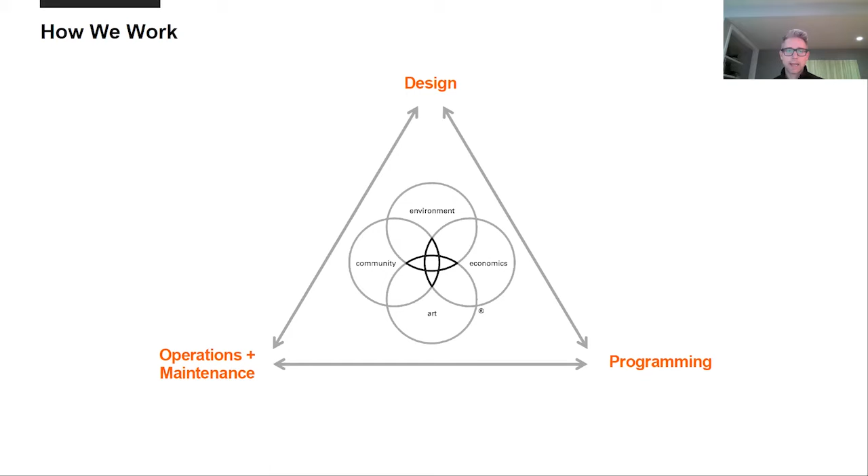We are a planning and urban design and landscape architecture firm consisting of roughly 150 super intelligent individuals who care dearly about the public realm and changing the world for the better. The firm has been around for nearly 50 years and has grown to 8 studios across the country, allowing us to work on a very broad range of projects, both domestically and internationally. Our process involves approaching each project from a comprehensive perspective that involves more than just design, including the activation and programming and the operations and maintenance of the spaces that we get to work on.

Today, I'm going to talk about 2 projects where we've reprioritized mobility and accessibility to allow for placemaking to occur. I'll be discussing our work at the Utah State University and in South Lake Tahoe. So first, let's talk a little bit about what it means to be in Logan, Utah at Utah State. We were asked to come to Logan, for me the first time arriving there, pretty special place set in the foothills there, to see what we could do to help restitch the Utah State campus back together again.

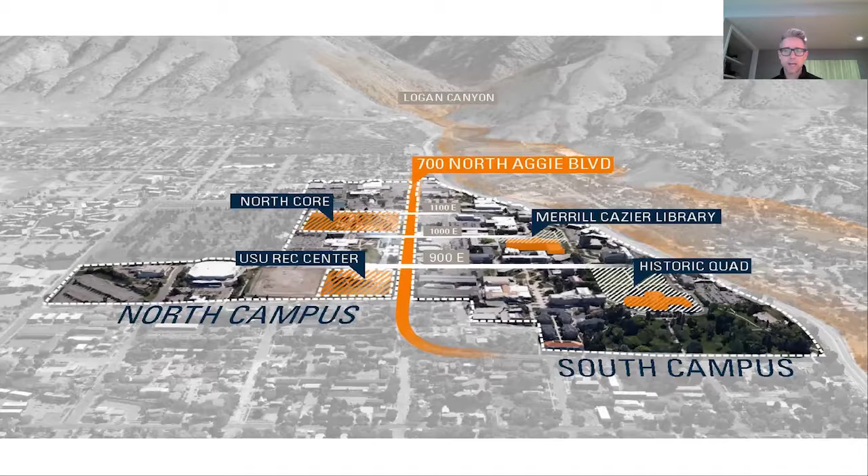What we found is a campus divided by a road designed to provide convenience for drivers at the expense of the true sense of campus and gathering. And this is very similar to what we've seen throughout the Midwest and on many college campuses. We learned that the original master plan from 1912 established 2 key axes that link the key open spaces together on campus. But as, again, many campuses have evolved, that key spatial order dissolved with the post-war growth and emphasis on the automobile. So our intention and our goal was to refocus on a barrier-free campus core and repair the damage that was done.

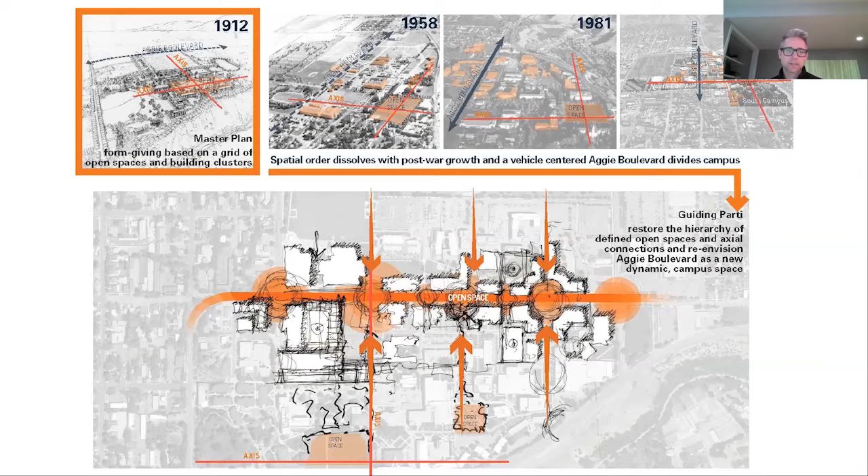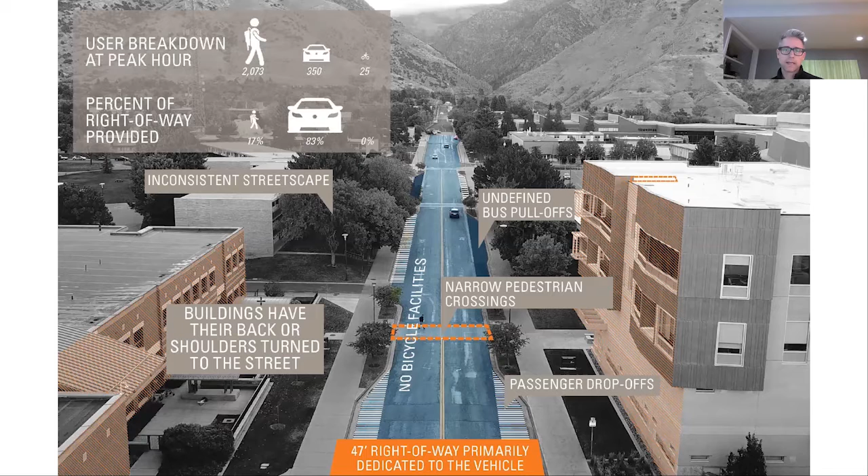What we found is very similar to many university campuses throughout the country, a massive barrier to mobility, accessibility, and unity within the campus in the name of convenience and ease of service access. These numbers showed, as suspected, a congested corridor that was prioritized for automobiles and their convenience, not pedestrians, and the safety and the movement of people.

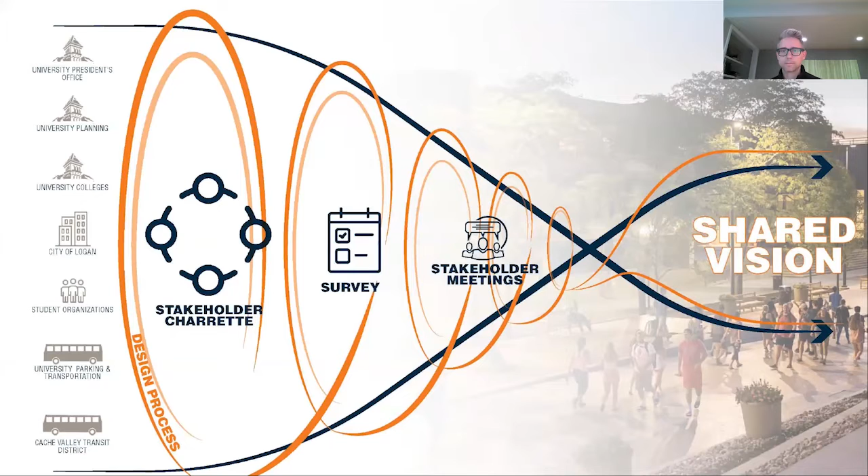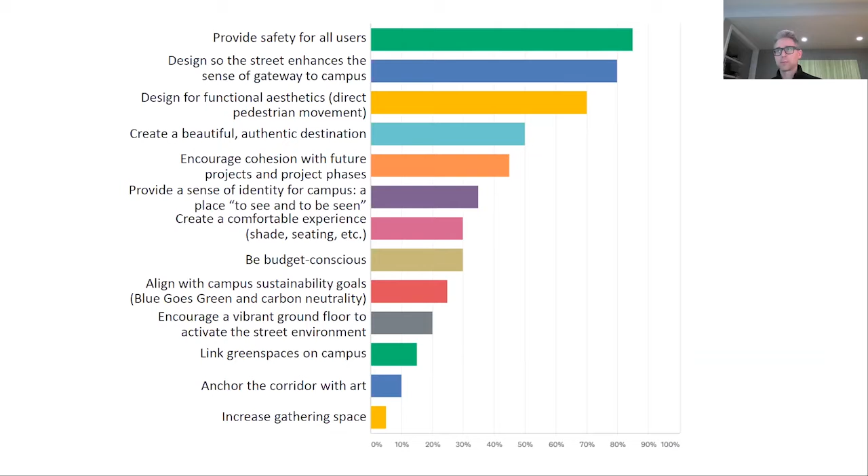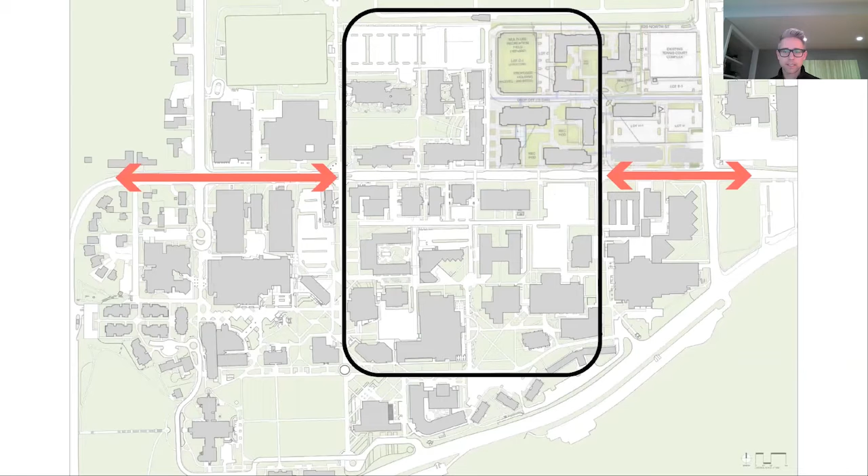As you can imagine, working on a university campus involves many stakeholders, from university leaders to public works departments, transit organizations, and so on and so forth. So many stakeholders, most times with competing priorities. Sorry, not advancing. But they were all aligned around this common goal of providing safety for all users, which was the key thing that we kept bringing people back to. Our goal was to go all in on the idea of completely removing automobiles from the center of campus, providing barrier-free mobility and returning to the original intent of the 1912 campus plan.

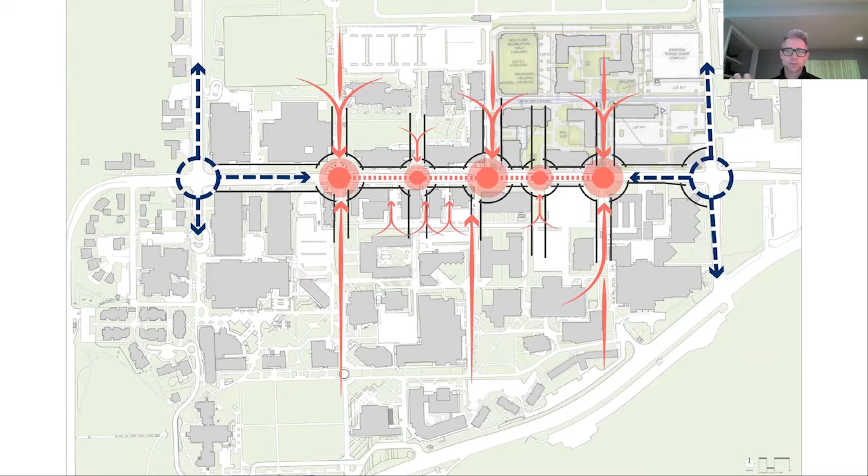This would allow a refocus of energy around nodes and points of crossing to provide safe access from North Campus to South Campus. To be clear, we were not recommending the removal of the campus transit circulator. That was one component that had to exist to provide sort of safe mobility to all parts of campus. We just wanted to remove the personal automobiles.

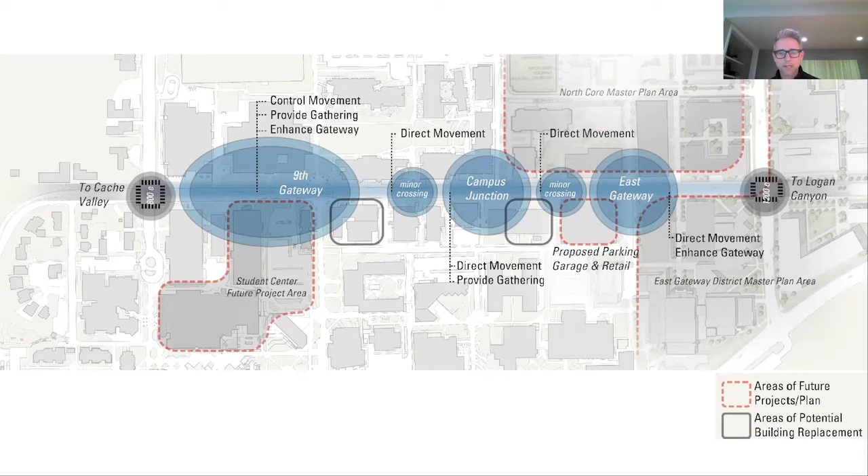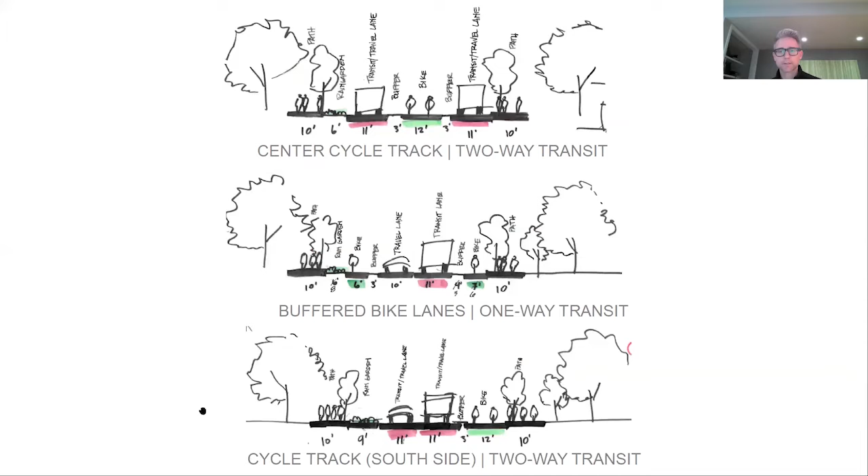So we still needed to address things like access control, large and small crossings, and the potential of reimagining this corridor for festivals and student gatherings. So we quickly studied a number of alternative sections that involved four main components: pedestrian movement, bicycle circulation, transit circulation, and green stormwater infrastructure. The vision we were selling was this access-controlled center of campus that accommodated all beneficial modes of campus mobility, phased in over a period of time, as most campuses do, to retrain people into no longer viewing this as a barrier, but rather a place for people.

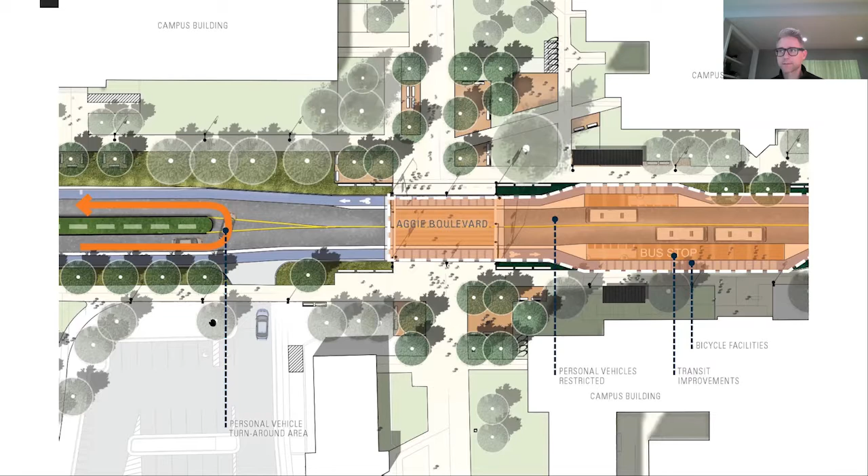As we look into the detail, a lot of what we were trying to do was to provide these safe nodes along Aggie Boulevard. We also incorporated inline bus stops and other mobility features, but this was really the point at which we were trying to stop the personal vehicles. And here's a crazy idea that you can actually train college students. What we discovered here was that by installing pedestrian controls, we could also reduce the number of pedestrian and transit conflicts. And you'd never believe that you could actually have a bunch of 20-somethings complying with those pedestrian controls.

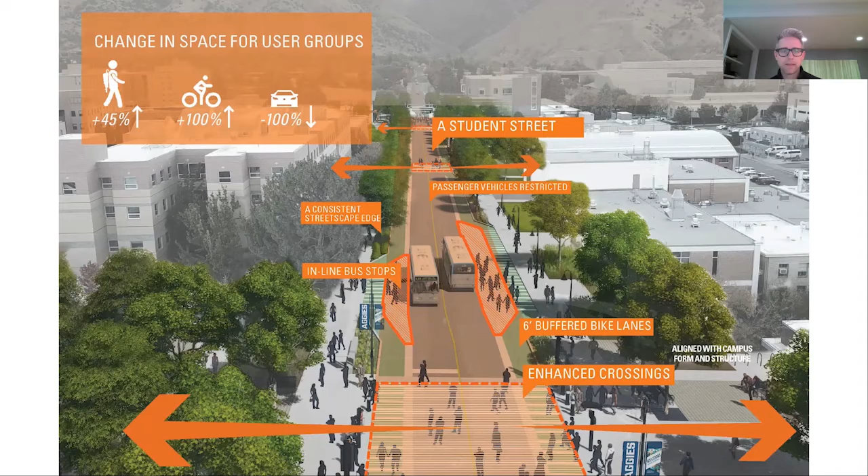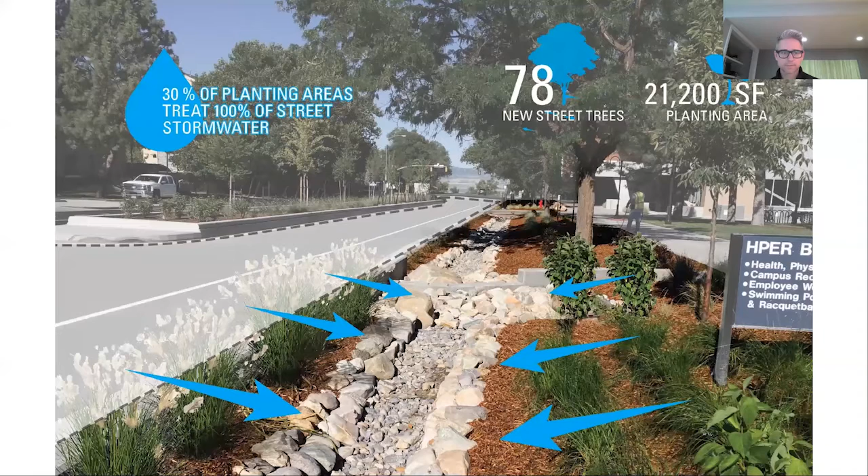As you can see here, in the end, there were many compromises that had to be made on all sides of the tables. We didn't get everything. We would have loved to completely shut this portion of the campus down. But we do believe we've moved the needle closer to a unified campus that is safer than it is today. And now in this section of campus, we additionally are able to treat 100% of the stormwater that falls on the street. So thinking about streets as complete streets that serve more functions than just moving automobiles. And this is the vision that we're trying to create here.

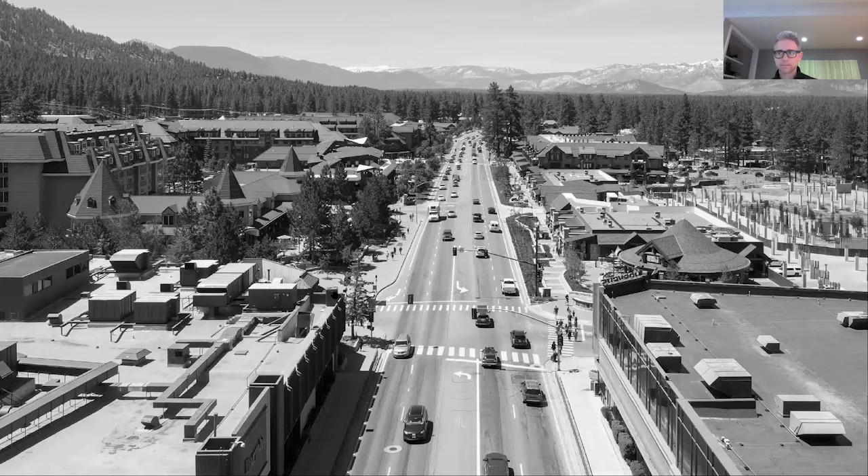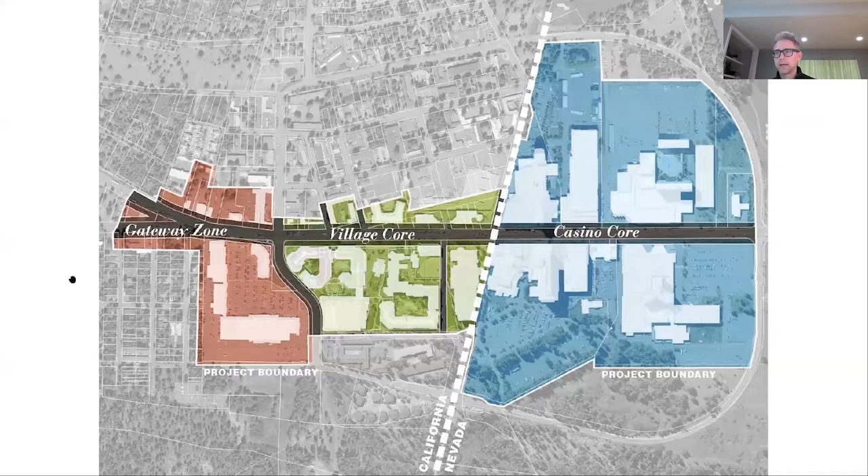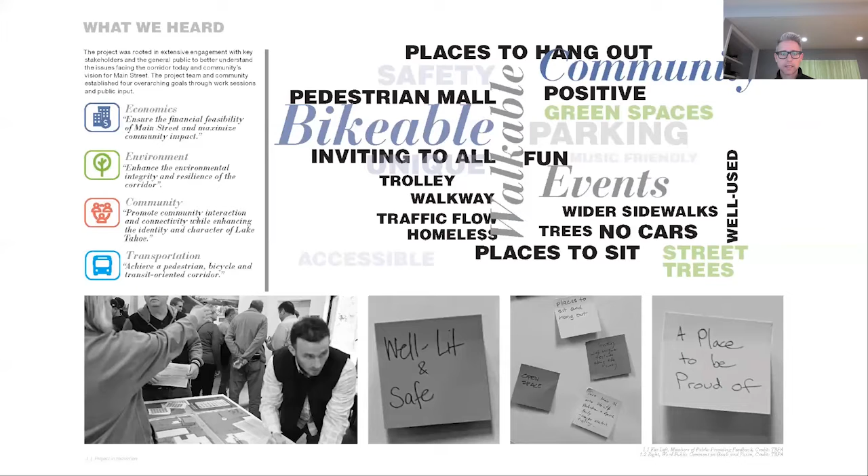So our task is trying to align all of these groups around a central idea and a Main Street concept. So we began by listening to the community, to a large stakeholder group, and started to prioritize and establish measurable goals along the way. Again, everyone was aligned around this idea of creating a much stronger pedestrian environment, one where it could provide a new identity for South Lake Tahoe. This all resulted in 5 main priorities, mainly focused around providing places for people and increasing accessibility and mobility.

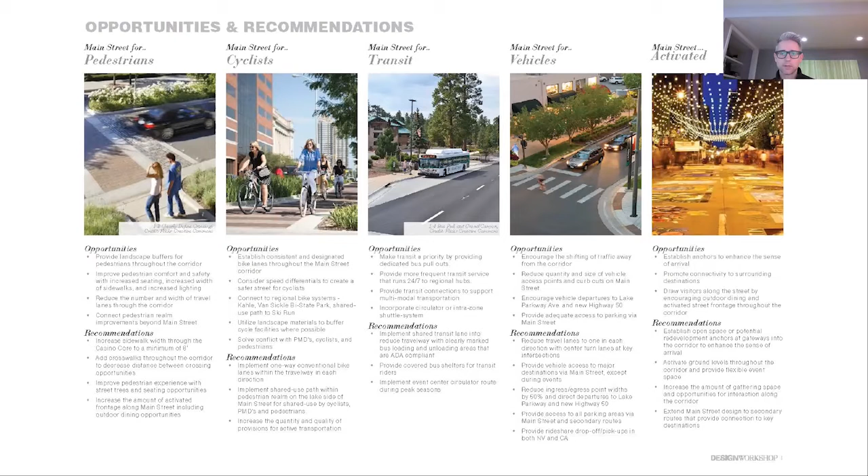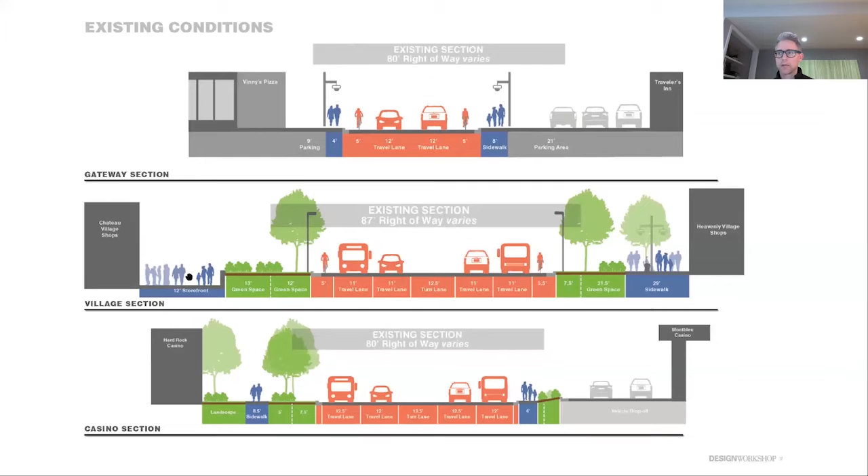As we all know, working on projects like this, rarely is the street cross-section the same. This is a mile-long corridor, and we had 3 very distinctive existing conditions to deal with. And so that was one of our main focuses, trying to figure out how to create continuity through this entire mile-long corridor. We tested a lot of the ideas.

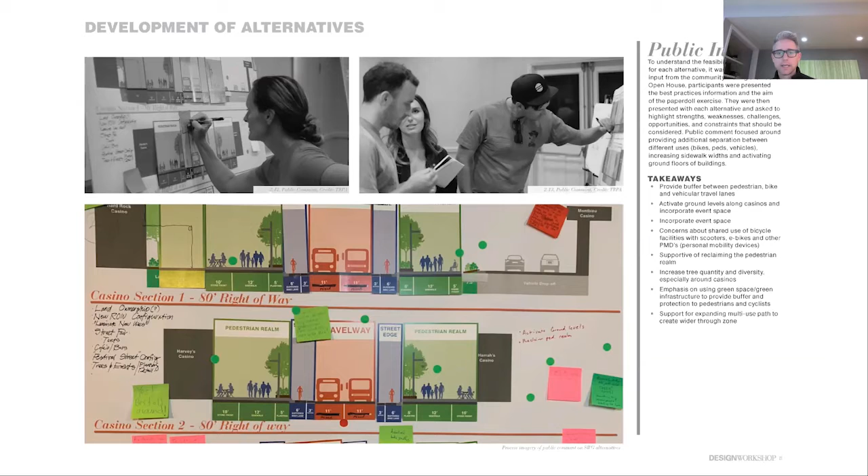We turned to the community to test these concepts and get some new perspectives. Specifically, we learned, shockingly enough to me, that on-street parking did not actually score very high in the list of priorities for the community. They wanted this significant road diet and more space for bike and micromobility and pedestrians.

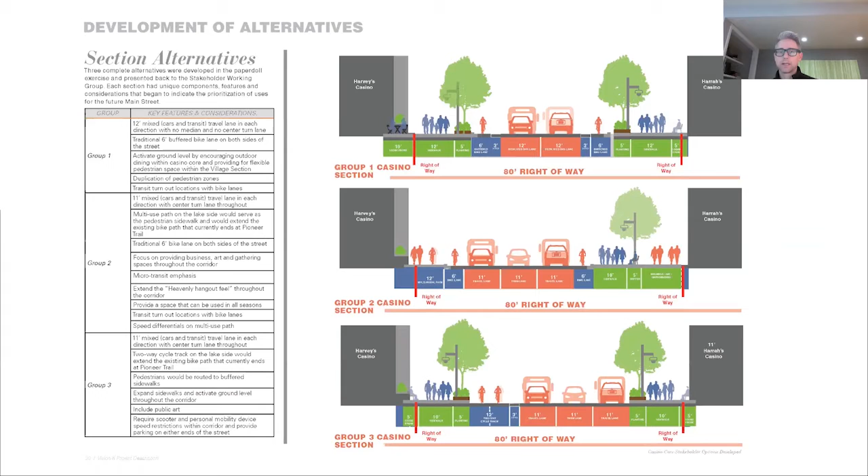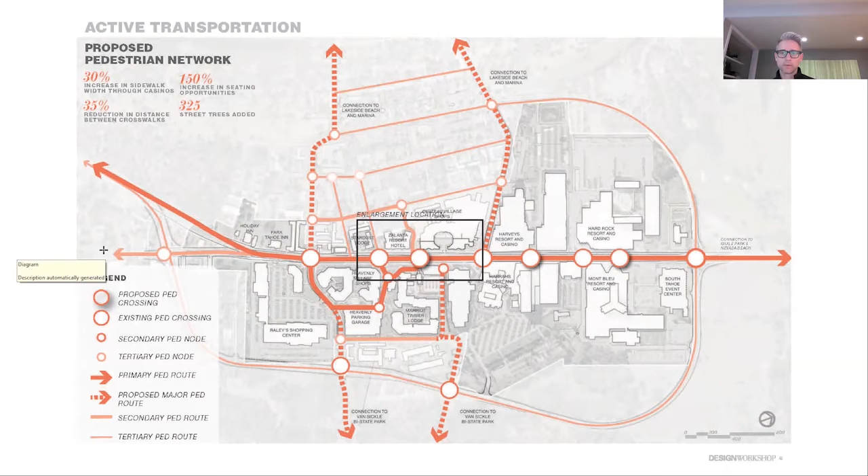This resulted in a number of different iterations in how we try to connect these spaces together, but ultimately into this systems diagram. From a systems perspective, we were looking at substantial improvements to the pedestrian accessibility of the Main Street through the addition of signalized crossings and wider sidewalks. We reduced the crossing distance within the core from 600 feet to 250 feet, making it a much more walkable place, and making walkability more enticing for user groups.

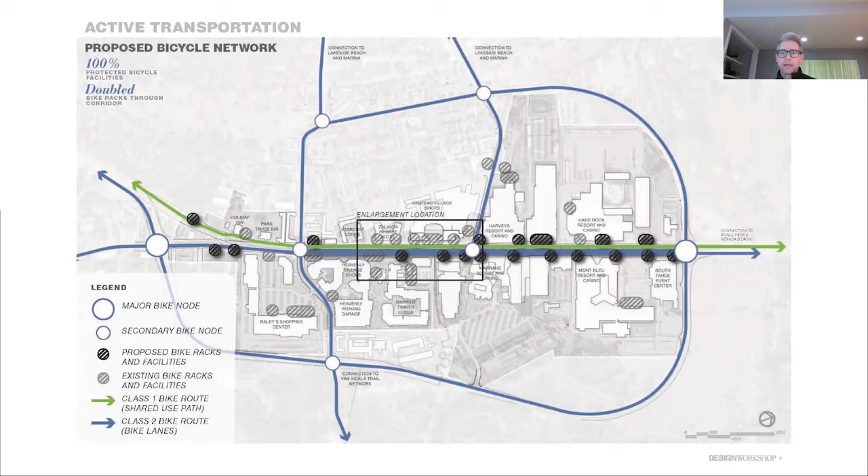With relationship to the bicycle network, there is currently a regional bicycle facility that circumnavigates the entire lake, but it was fragmented through this section. It didn't continue through the casino core. So first we had to accommodate that regional facility, and then provided additional, more recreational bike mobility throughout the corridor as well.

PMDs, as they're likely hot everywhere. Interestingly enough, many of the PMD companies actually did a lot of their prototyping and testing in South Lake Tahoe. So there's kind of a long history of PMDs in the town.

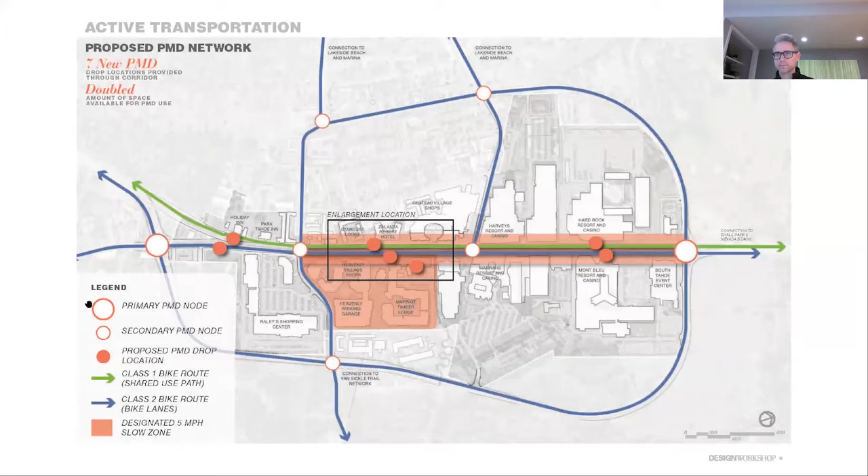And so the 2 largest complaints with PMDs right now is where do they belong? Do they belong on the sidewalks or in the streets? And why can't we design a series of corrals or something to congregate these when they're not in use? And do that in a way that it doesn't take space away from the pedestrian sidewalk circulation.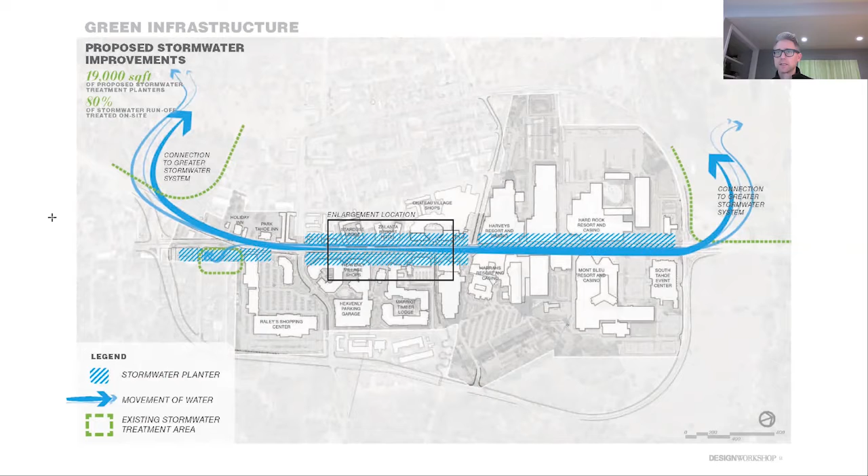In addition, if you've been to Tahoe, they have bumper stickers all over that say "Keep Lake Tahoe Blue." So water quality and detention had to be thought of simultaneously. And why I bring it up is because the real estate needed for that sometimes was in competition with our other project goals and priorities. And so this was a challenging thing for us to do, to make sure that we're trying to incorporate all of these things into one.

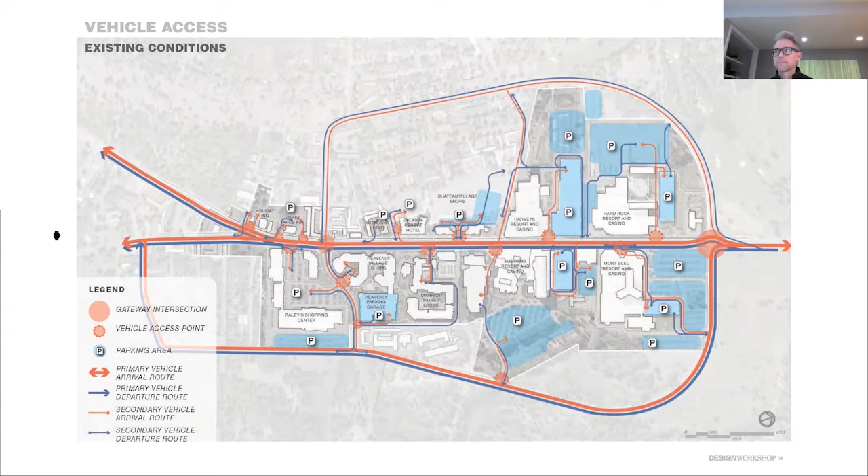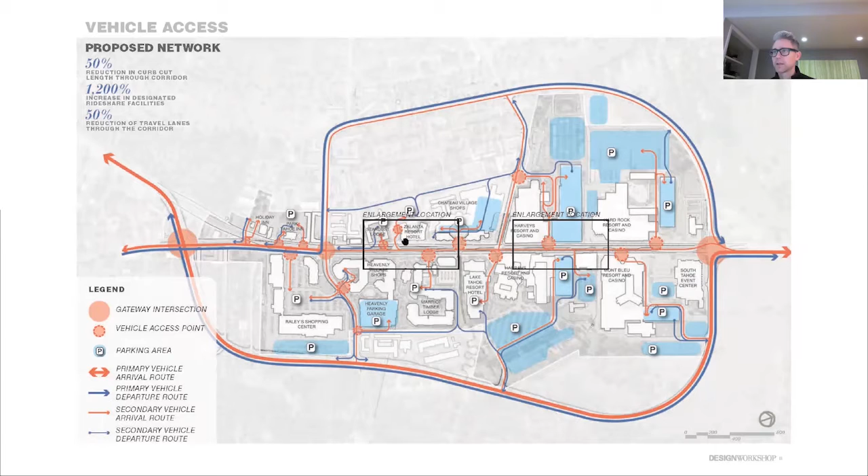Ultimately, the single largest impact to accessibility and the character of Main Street is the diversion of the traffic around Main Street. So that's this proposed route around here. And you'll see here the proposed condition that includes the bypass. This allows us to close a number of vehicular curb cuts and reduce conflict points along the corridor. And as we start to zoom in here, you can start to see some of the improvements. We're going to look at this in the 3 segments again.

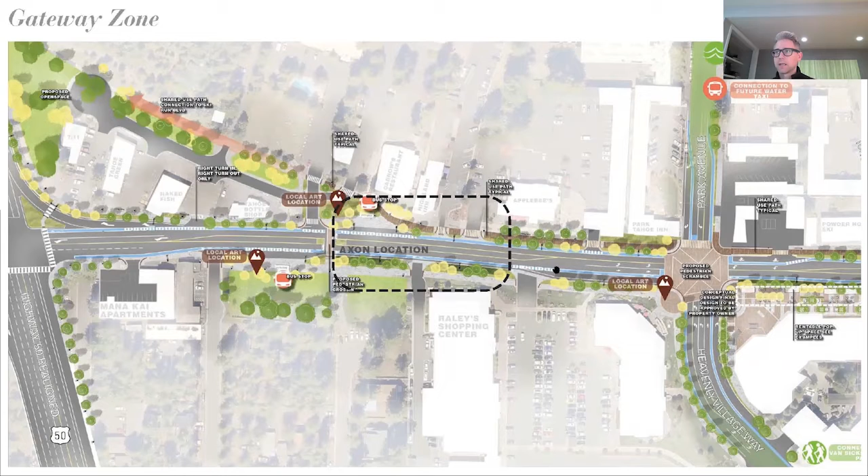The gateway zone, which is the much more kind of community-based zone. Here's where we are incorporating elements of the continuous bike lanes, the much improved and increased pedestrian and public realm, and allowing for more transit facility access.

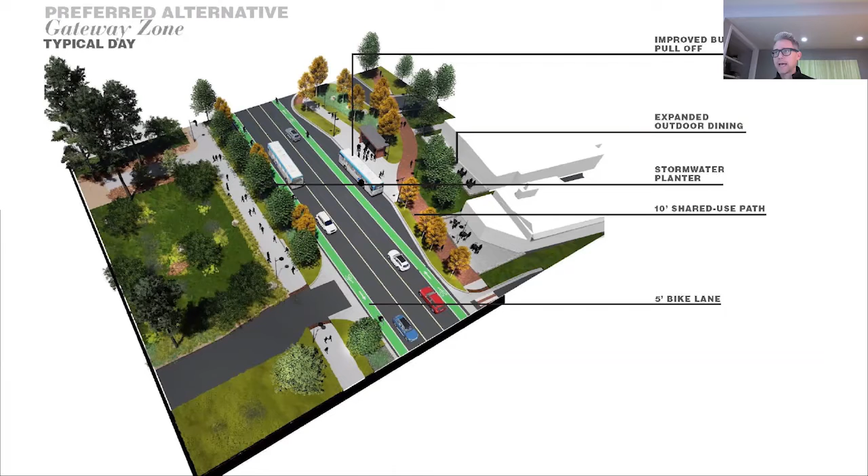In the village core, things become a little more complex. It's important, again, to note the community and the stakeholders voiced loud and clear that they were not interested in on-street parking, which is contrary to what we typically like to do in a main street for both traffic calming and just for access and the activation of some of that ground floor retail. So that was foreign to us.

But I think whenever we presented it and we showed the expanded curb to curb, people had such an adverse reaction to more pavement. And so a massive road diet was on everybody's mind here, to go from the 5-lane cross section down to as narrow as they possibly could. And I know this is small to read, you probably can't read it on the screen, but there are a few things that I'd highlight.

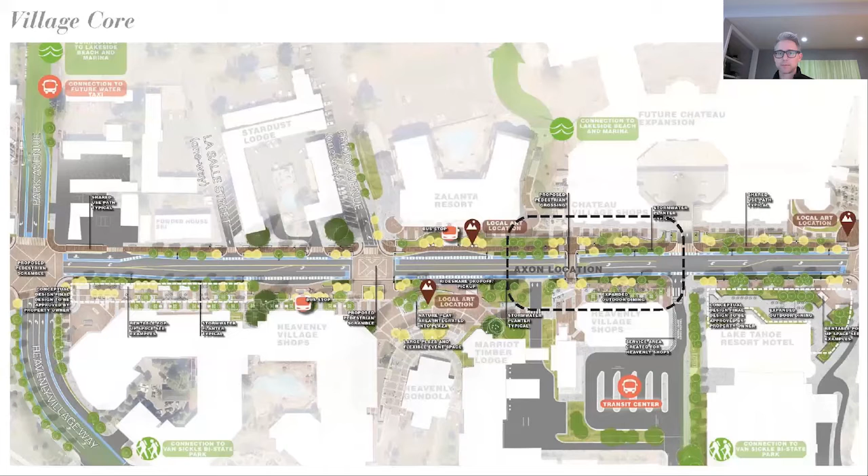The rideshare drop-off and pickup was an important component here. The real transit facilities that we were able to add in here. And then, as I mentioned before, the ability to bring in mid-block crossings to really promote and expand the walkability of the place. You can see some of those improvements here. We also had an opportunity to expand the outdoor dining. This all happened pre-COVID, so while it made sense then, it makes even more sense now to provide those spaces that don't actually impede on the pedestrian space.

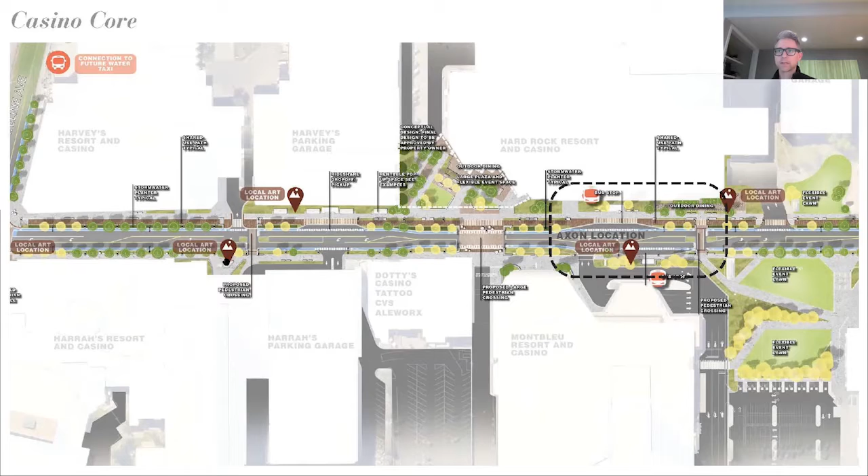In the casino core, this is the most challenging section because Nevada did not have the same level of setbacks that were required in the other cores. And so the right-of-way distance is much tighter. Something had to give, and in a lot of cases, we had to get rid of the green stormwater infrastructure so that we could still have that continuity of the regional bike facilities and the localized bike facilities, as well as some increased pedestrian space along the way.

We were able to also add an additional crossing here, further reducing that crossing distance to something a little bit more approachable, which was around 250 feet or so, as opposed to like 600 feet.

Hanging up here, sorry.

Sorry for the delay here. Well, maybe I'll just, oh, here we go.

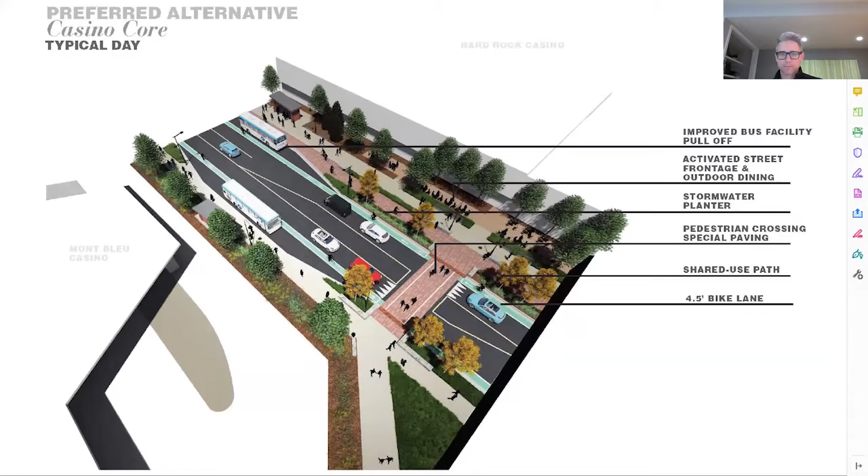Okay, so the last couple slides I just wanted to cover was this idea that because we were able to reduce the overall cross section and do a road diet here and really divert that throughput traffic of vehicles and deliveries and all that kind of stuff around Main Street, we were able to then focus on bringing people back to the street and changing the attitude of how people saw the street. And we found ways to create these scenarios where we were doing festivals within the street.

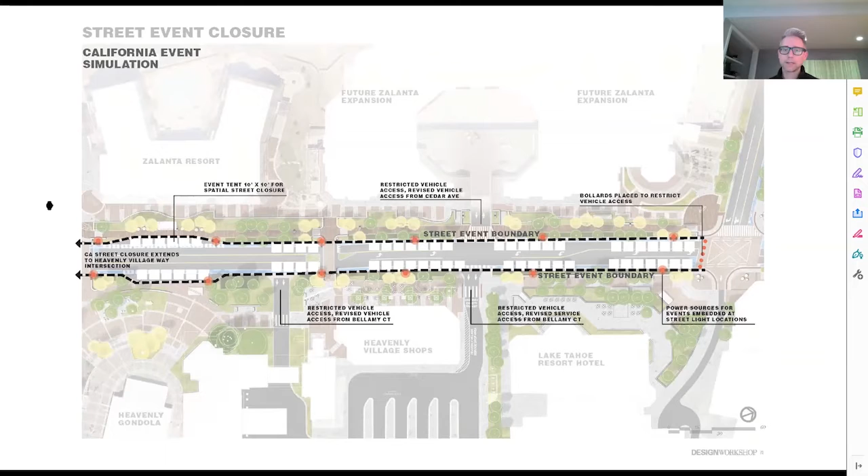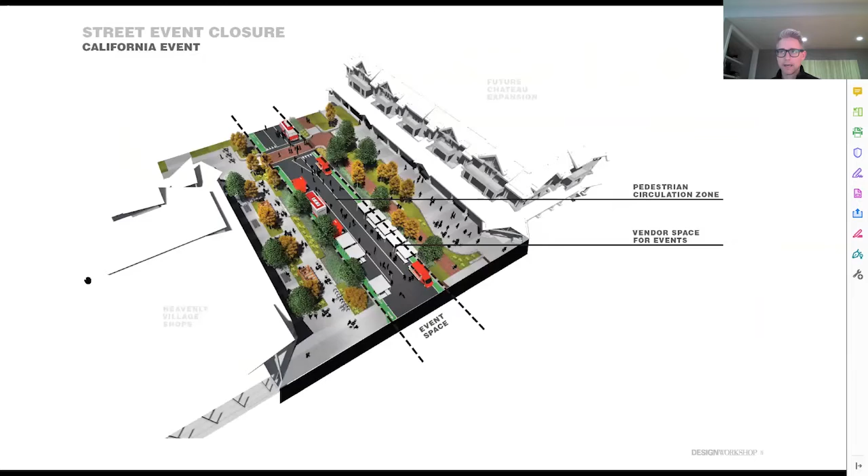And of course, that meant making sure that we accommodated both the service delivery, the emergency delivery, all of those things on event days, whether it was occurring in the California side or in the Nevada side. So just some ideas about how we event those spaces. And then we were also thinking about programmatic things and accessible items that we actually could build into the street network.

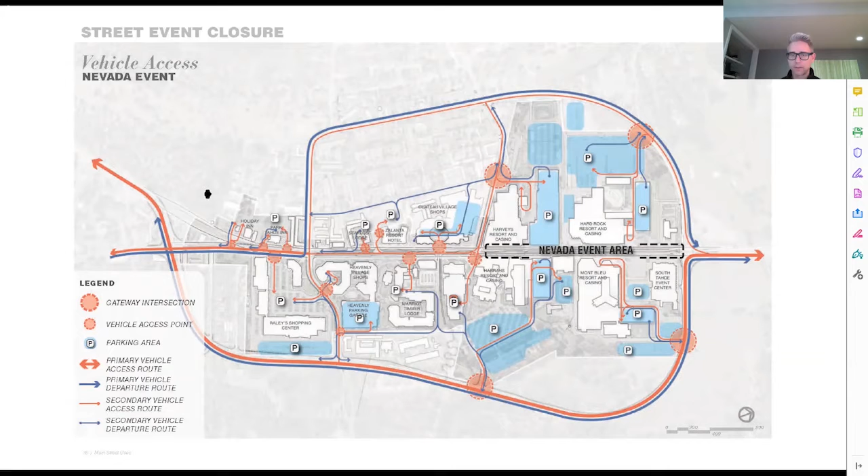And again, if you look at, what does that look like circulation wise in terms of if there's just a Nevada event, how do vehicles move around? How does service happen? How does emergency access happen? Because things do happen on the one state or the other state side regularly, we had to plan it that way. And then sometimes it happens across the whole network.

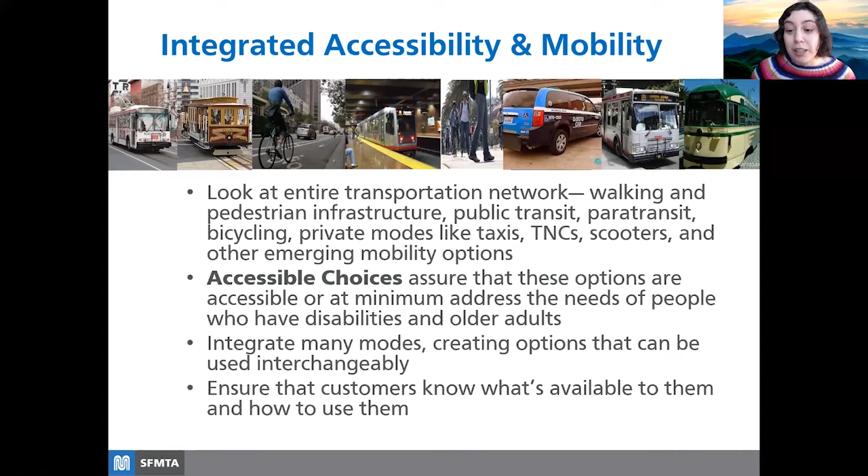We approach our projects with universal design principles. Universal design is the design of an environment so that it can be accessed and used to the greatest extent possible by all people, regardless of disability, age, and so on. The term was coined by architect Ronald Mace, who was a wheelchair user. And in transportation, we sometimes talk about an 8 to 80 approach, designing infrastructure that can be used by people across generations, people ages 8 to 80. Universal design is an even more expansive concept, and it centers disability.

And of course, when we design for accessibility, everyone benefits. This is known as the curb cut effect. Curb cuts or curb ramps make streets accessible for people with disabilities by providing a ramp transition from the sidewalk to the street. But curb ramps also benefit parents with strollers, people with luggage, and so on. Design that is usable, legible, and accessible for people with disabilities is design that works better for everyone.

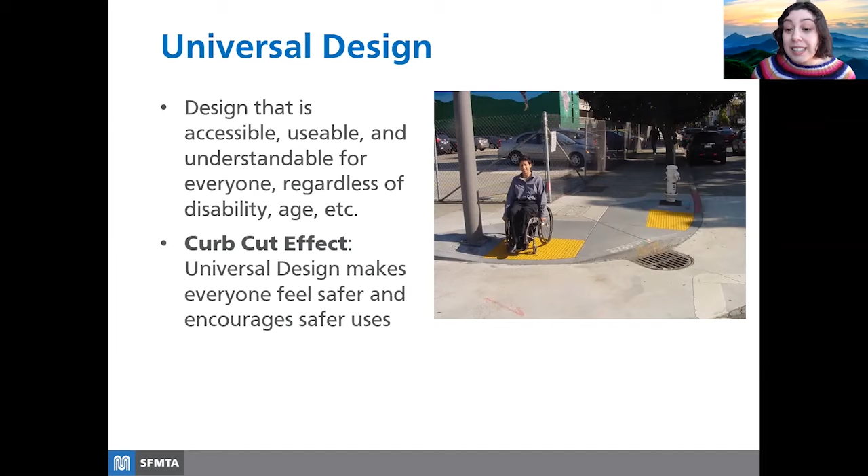In San Francisco, one of the tools we've used to put these principles into practice is the Getting to the Curb design guide. This guide, which was released by Walk San Francisco, came out of a design charrette with advocates from Walk SF, the San Francisco Bicycle Coalition, a number of disability rights organizations, and city staff. The guide contains a series of design principles for building protected bike lanes that are safe and accessible for everyone. We have resources linked at the end of the presentation if you want to check it out. And now to discuss how we've operationalized this guide, Kimberly will share a case study from her work on Valencia Street.

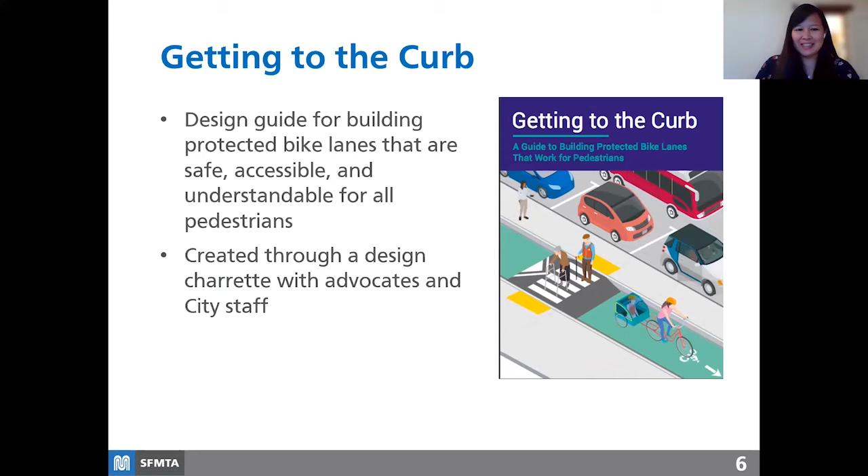All right, thank you, Maddie. Let me just advance the next slide here. I think it's stuck. There we go. So hi, everyone.

Again, my name is Kimberly Leung, and I'm an engineer with the San Francisco Municipal Transportation Agency. I'm also the project manager for the Valencia Bikeway Improvements Project, which I've managed since 2017. So we're going to be using this project to showcase some of the principles from the Getting to the Curb design guide. And I do really want to emphasize that, with Valencia Street, it's not just simply an 8 to 80 bike facility that we're trying to design here. The MTA really does try to include accessibility for all users, whether you're traveling by car, transit, foot, or bike, into our project. This definitely includes people who do have disabilities or are a part of our senior population.

But even with all these improvements along the corridor, there's definitely still room for change. And in fall of 2018, our mayor, London Breed, directed the MTA to really expedite the Valencia Bikeway Improvements Project and to go ahead and design and implement a protected bikeway pilot on the northern end. And she wanted this done within 4 months.

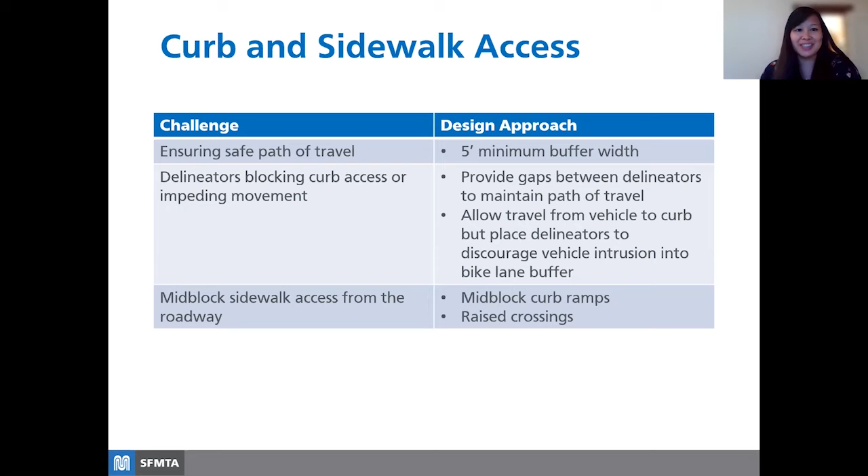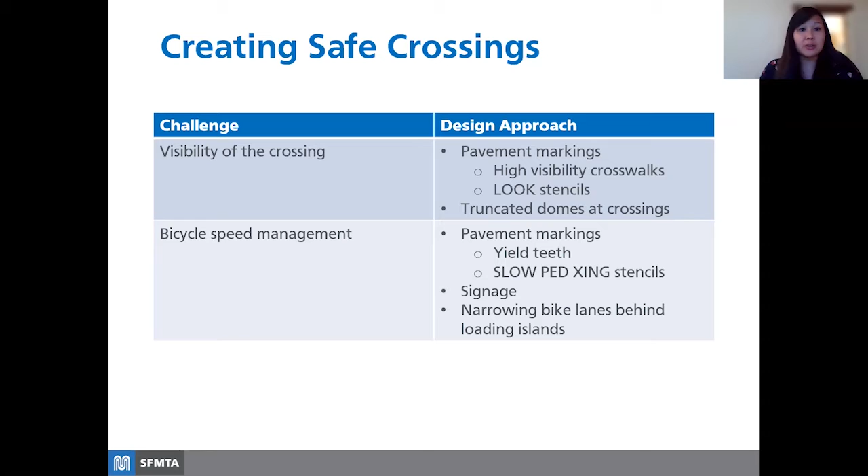In terms of bicycle speed management, again, there's definitely opportunities here to do pavement markings such as yield teeth or SLOW PED XING stencils just to give cyclists warnings that there is a crossing coming up ahead. Signage is also another tool that we use. Another thing related to this is that there is an opportunity here to narrow the bike lanes adjacent to the loading islands to really encourage cyclists to go slower or to even go single file when approaching a potential crosswalk.

So with this type of spacing, it provides a little bit more space for bikes. It provides a safe path of travel for pedestrians. And of course, we did make sure to make this at least 5 feet. And with this type of design, we're also providing easier access overall for passenger and commercial loading needs. One of the other things about this design is that in the case of a paratransit vehicle, if they do need to pull to the curb, they are able to kind of navigate their way through those safe hits and pull curbside to help load or unload any passengers.

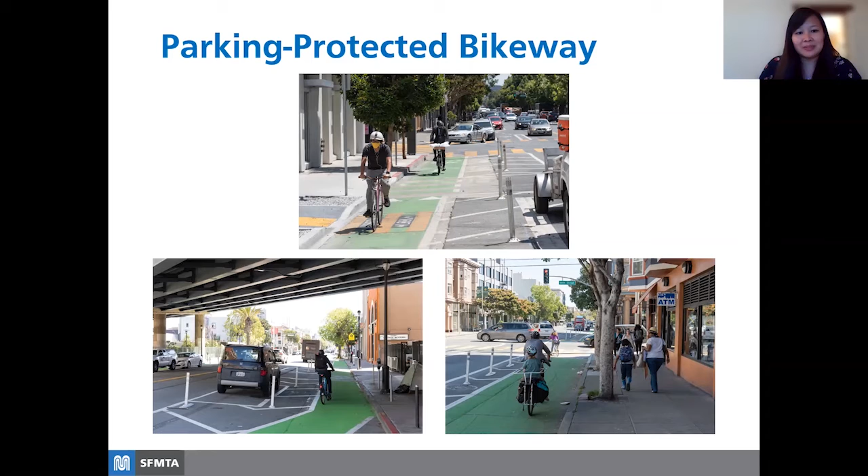So in this next slide here, I want to talk through one of the newest things that we chose to do as a part of this project. So in one block of Valencia, there are 2 schools that are located on opposite sides of the street. Both of these schools serve elementary as well as middle school students. So as a part of this project, we did hear a number of concerns from parents. They were concerned about their students crossing that bikeway.

So one of the things that we chose to do in this project was to actually construct concrete loading islands with an accessible path as well as a railing to really help channelize students or any passengers to designated crossing points. And this is really building upon that transit island concept that we already had in San Francisco, but we made some tweaks to it to really work better for the students in this area. So you'll notice that the railings on the backside have very few gaps, and they're very small gaps because we wanted to make sure that this wasn't something where students could climb through or cut through. So we wanted to make sure that we were really addressing the safety concerns when it came to students.

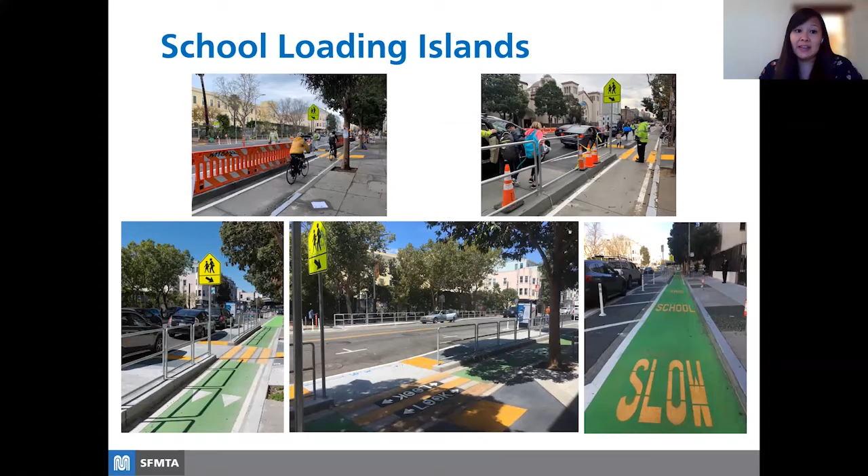So since this is a newer design that we hadn't done in San Francisco yet, we made sure to fully evaluate it. So we did do an evaluation in the summer and also in the fall of 2019, and there were no close calls observed at the school loading island. We did see that the number of interactions between cyclists and pedestrians did increase, but in general, bikes were yielding to pedestrians. So we felt that this was a successful design that is now being used on other bike corridors in the city.

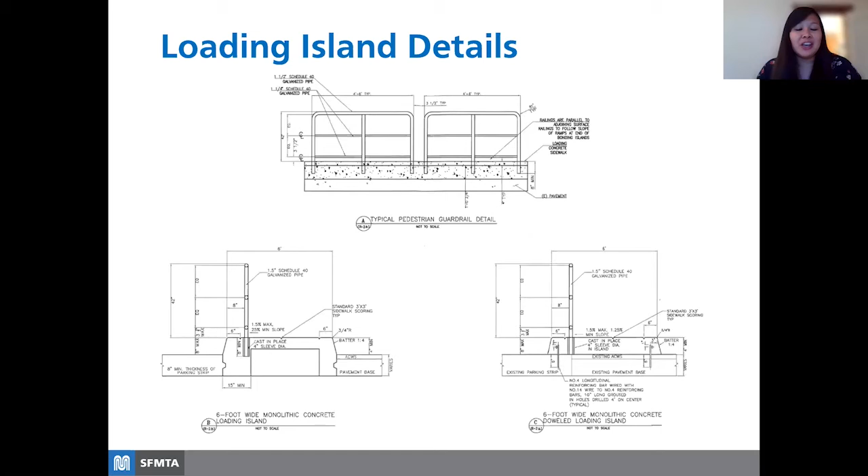And for anyone here that may be more interested in the nitty-gritty details of the loading islands, I did provide some engineering drawings here, but just from a very high level, these islands were designed to be 6 feet wide, and they were actually doweled into the roadway, so we didn't actually have to do any excavation of any sort. The railings themselves were made from galvanized pipe, and we made sure to have sleeves in the island itself when we were constructing with the concrete, just so that we can pop those railings right in. And all this work was done in-house by our public works crews.

And just the last thing that I wanted to share regarding this project is that, as a part of all this work that we were doing, we always make sure to do a full evaluation of our projects. We wanted to take a look at the behavior that was happening out there, whether or not this was actually an effective design, and how this project was helping with mobility and even the perceived comfort out there. So, again, we really wanted to go back and take a look at some of the design challenges and approaches that we were using when it came to the curb and sidewalk access, as well as safe crossings. So with this project, there were a lot of iterative changes that did happen later on, especially through the outreach and evaluation. And we really wanted to hear about people's experience.

So, throughout the project, we made other changes, including adjusting the color curbs to better meet the needs of merchants and residents. We installed parking tees adjacent to those loading islands just to really clarify that space between the parking lane versus the travel lane. And then all those improvements that you saw with the school loading islands, those all didn't come at once. When we initially installed the project, we had the green bikeway and we had the crosswalks. But it was over time that we decided to add the yield teeth, to add the look stencil and the warning messages. So we just really wanted to continue making sure that was a safe place for children to cross.

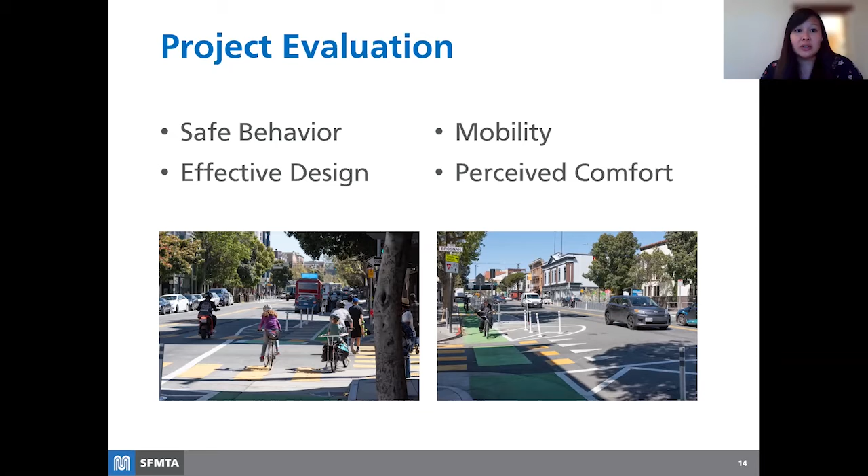And then, of course, the curb ramps, which I've mentioned a few times, but those didn't come in at the start of the project, but it was something that we committed to doing, particularly for our passenger loading zones and blue zones. So just with this overall Valencia project, again, it was a bikeway project, which is how this project started, but we wanted to make sure that as a part of our design, we were being inclusive and making sure that we were providing accessibility and mobility options for all users of this corridor.